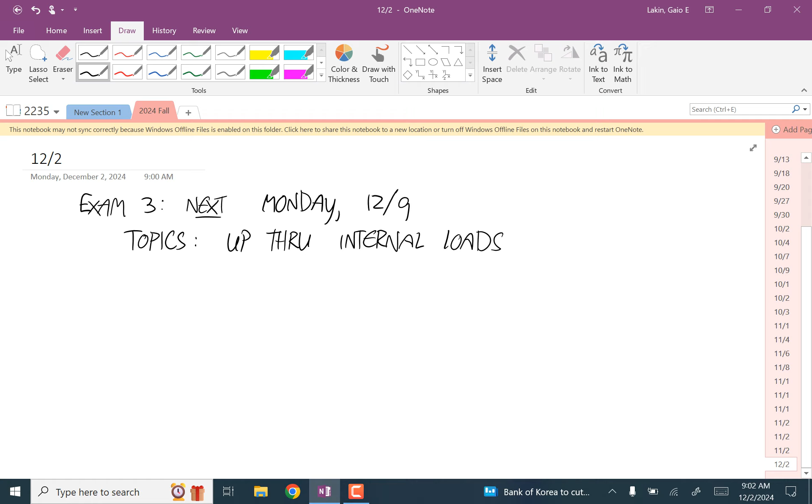But this is about as complicated as these internal loads problems get. Remember, this is the one where we did the structure and calculated the internal loads on all the members, and this was the last one we hadn't done yet. If we have a good chunk of time left after I'm done with this, we'll get into friction.

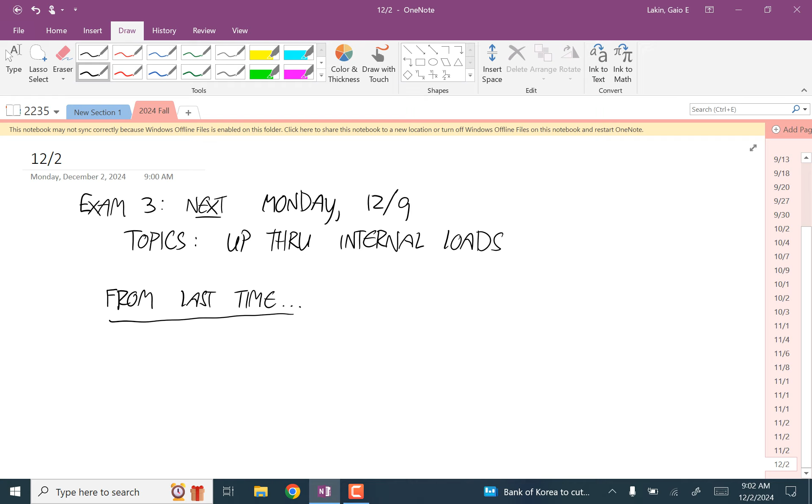Okay, so from last time, we have this beam with a force over here of negative 200.40, negative 34.28, and then just an upward force at the middle of 266.67.

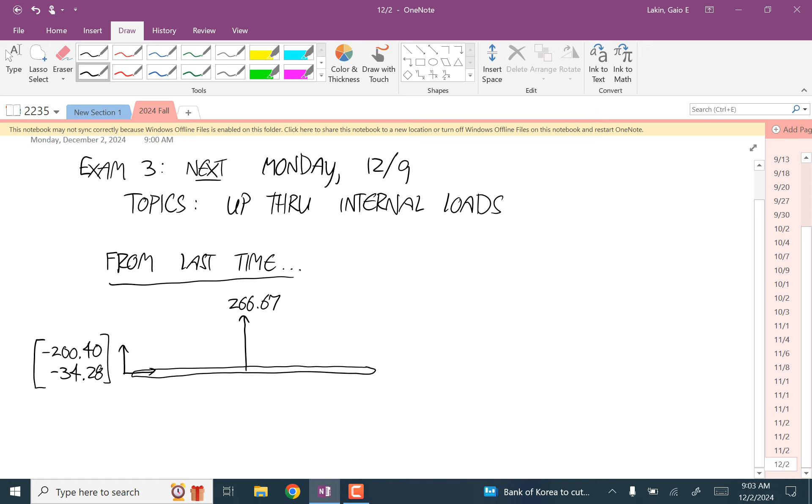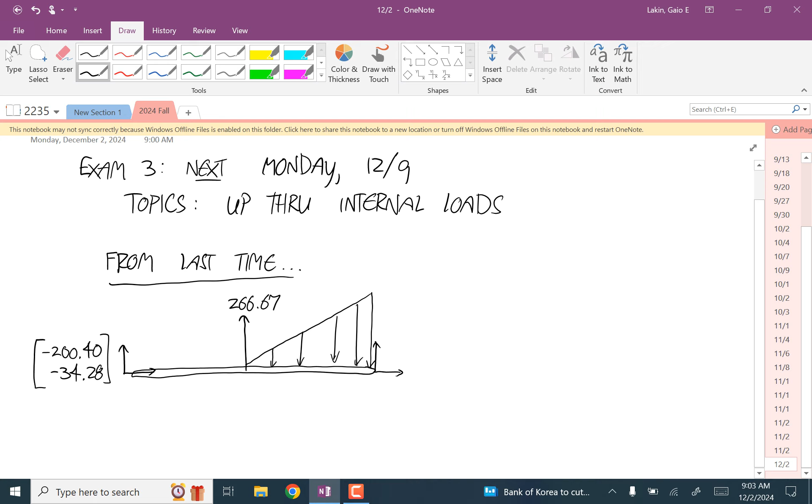A force at the end that I don't have written down - it's not going to come into the internal loads. A triangular distributed load with a maximum of 600 newtons per meter, and a distributed load for the weight of 49.05 newtons per meter.

Okay, so that's the free body diagram of the whole thing before we turn any of these distributed loads into point forces. How many cuts are we going to make? 2. Yep. So there's the endpoints and the one place where, in this case, we have both a point force and a change in distributed load function, so the only cuts are there and there.

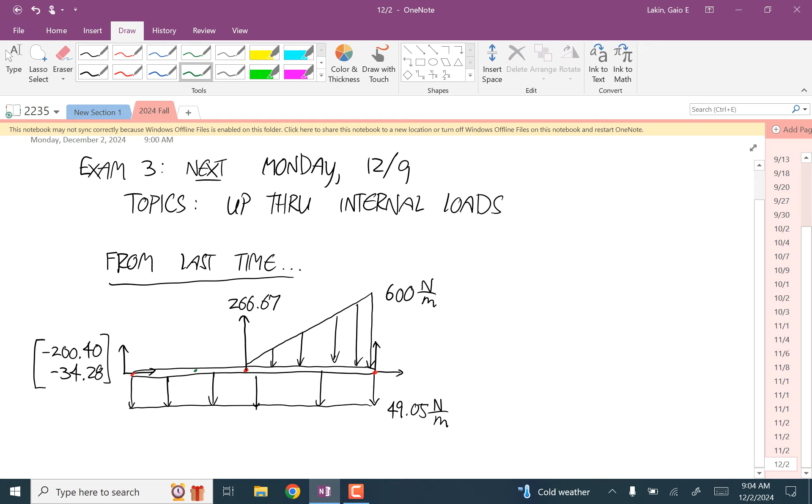I don't have written down how long this thing is. 2 meters? Yeah, I think that's right. So the first cut is for x's between 0 and 1.

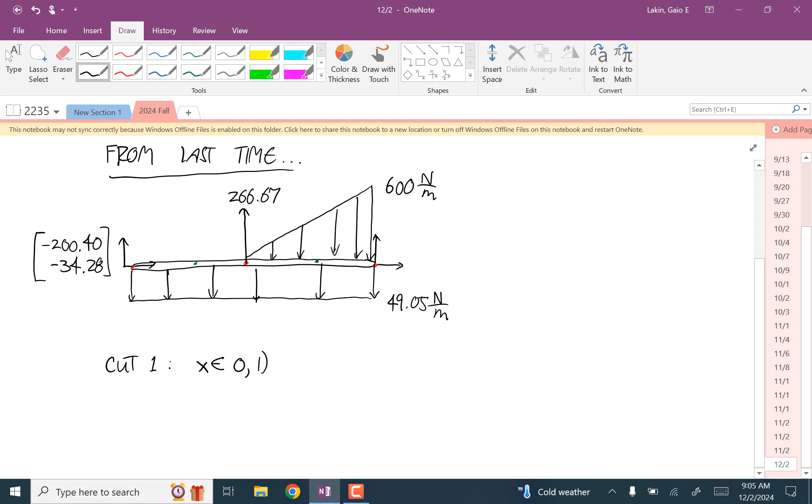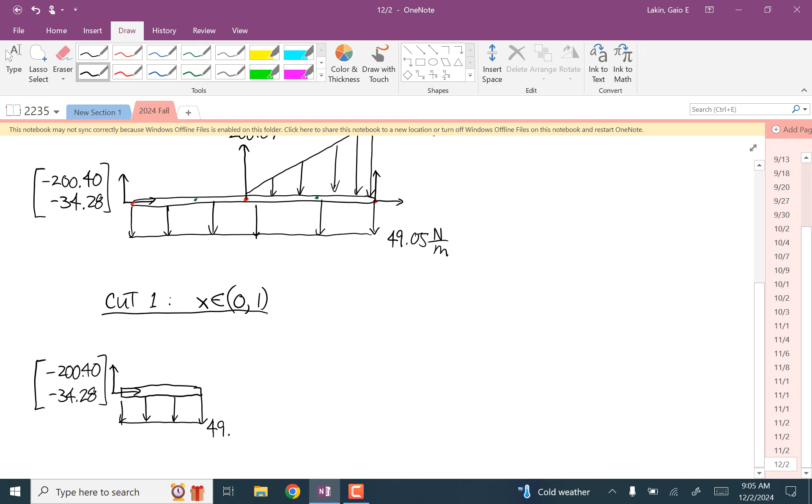And this one's easy, there's not much going on here. Negative 200.40, negative 34.28. And then you have this distributed load with a height of 49.05. The whole thing has a length of x.

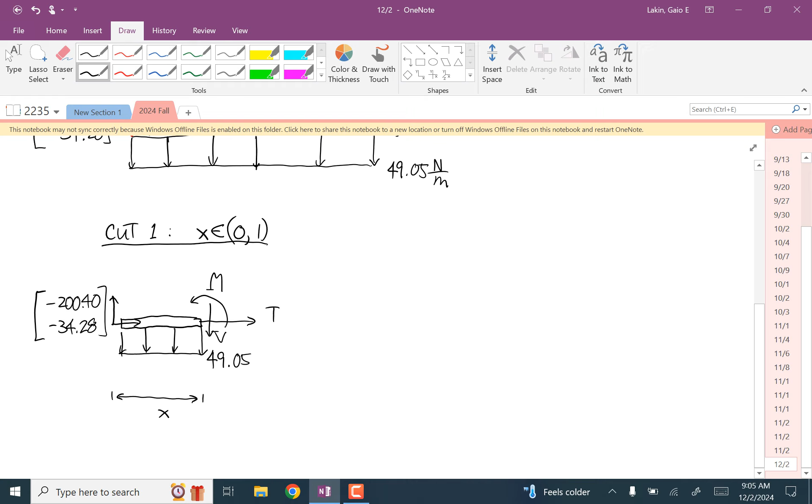And then the internal loads. We need to turn that distributed load into a point force. It has a height of 49.05, a width of x, and the centroid is right in the middle, so from the end this distance is x over 2. The area is the area of a rectangle, height times width, so 49.05x.

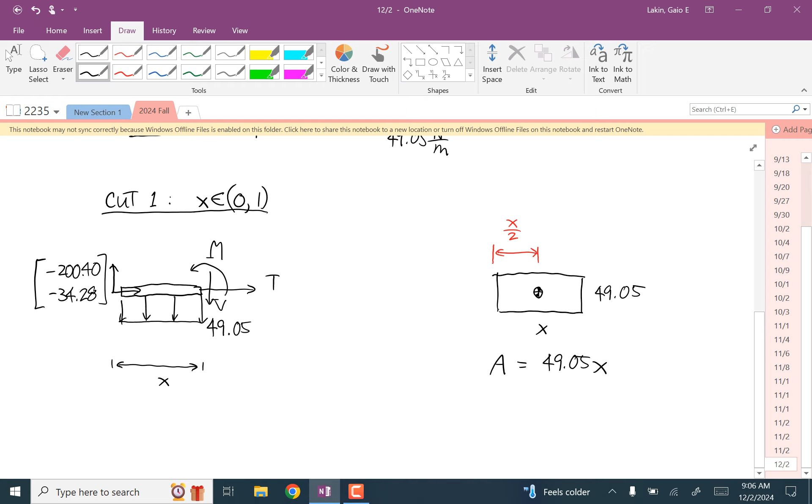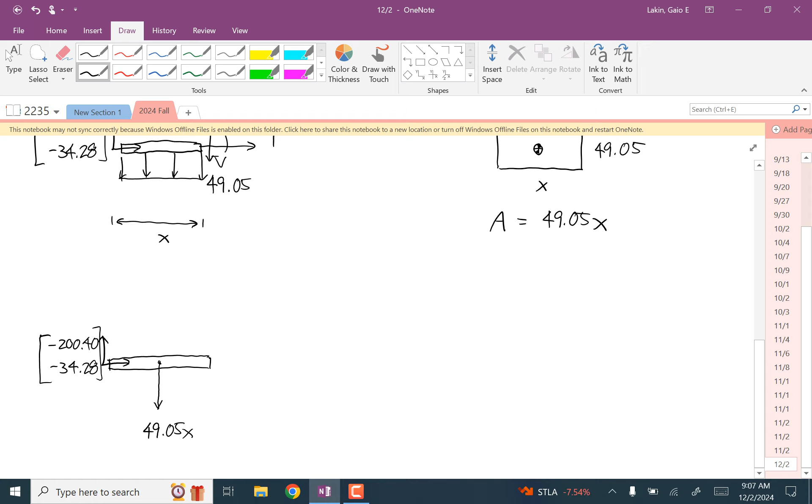And so now we can rewrite this, replacing that distributed load with the point force. So over here we have negative 200.40, negative 34.28, a downward point force at the middle of 49.05x, and then the internal loads.

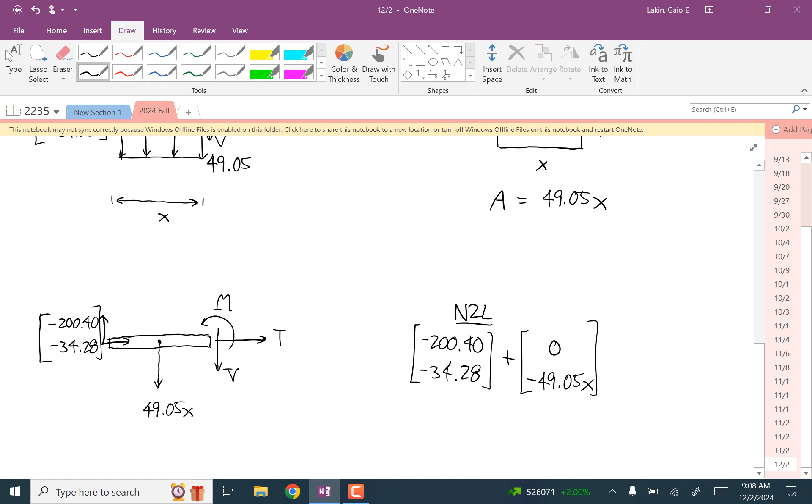So Newton's second law says negative 200.40, negative 34.28, plus 0, negative 49.05x, plus t, negative v is equal to zero.

So the internal tension is 200.40, and the internal shear force is negative 49.05x minus 34.28.

And then the moment equation: we have a clockwise moment, so negative, with a moment arm of x over 2 times the downward force of 49.05x, plus m minus vx is equal to 0.

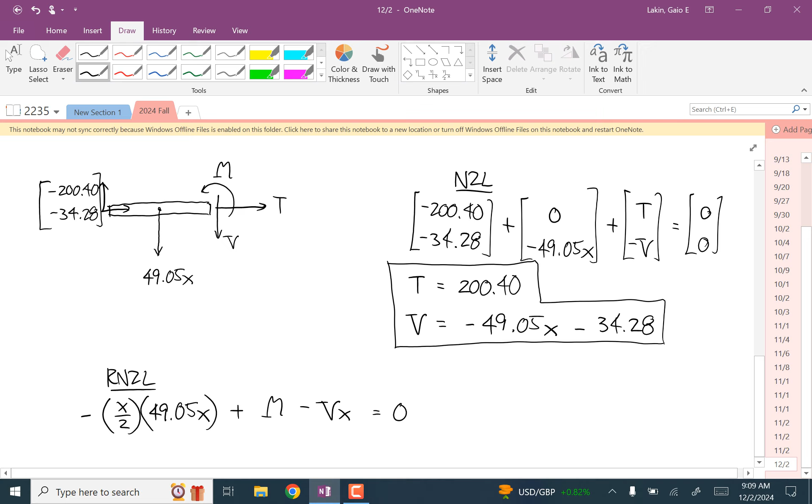And so m is equal to 24.525x squared plus v times x, so that is minus 49.05x squared minus 34.28x. If you simplify, m is equal to negative 24.525x squared minus 34.28x.

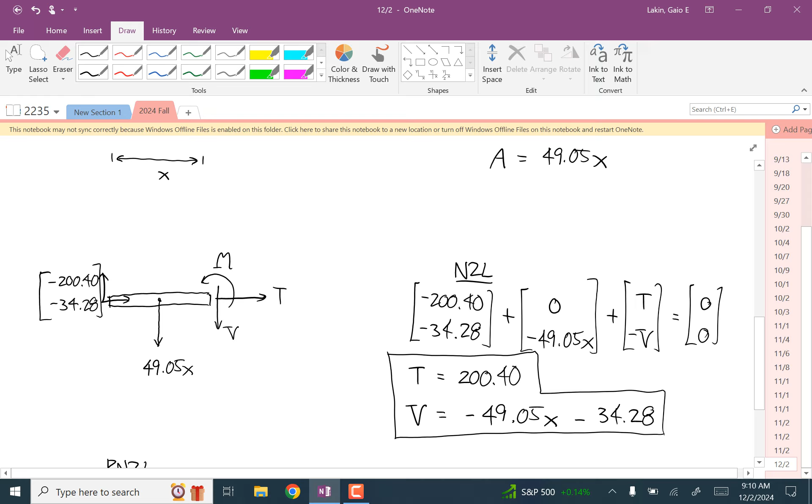dm/dx is equal to v, so that's a good sign. Negative dv/dx is equal to q, which in this case is just that constant, so that's a good sign. Okay, any questions about the first cut? That's way easier than the second cut.

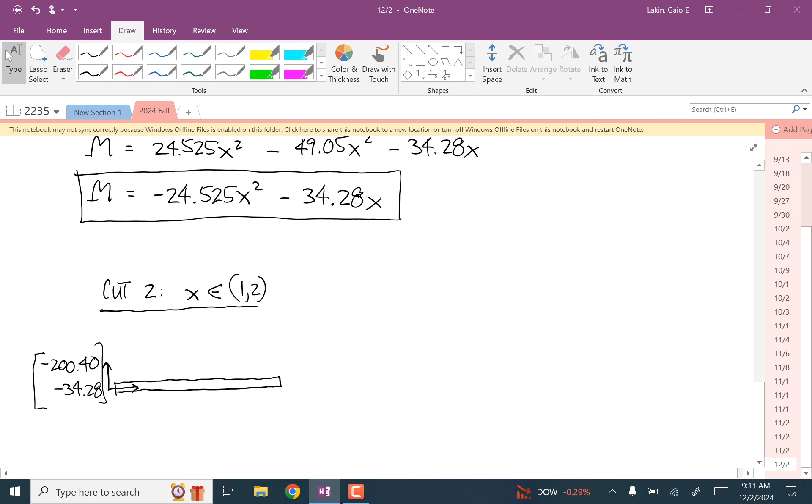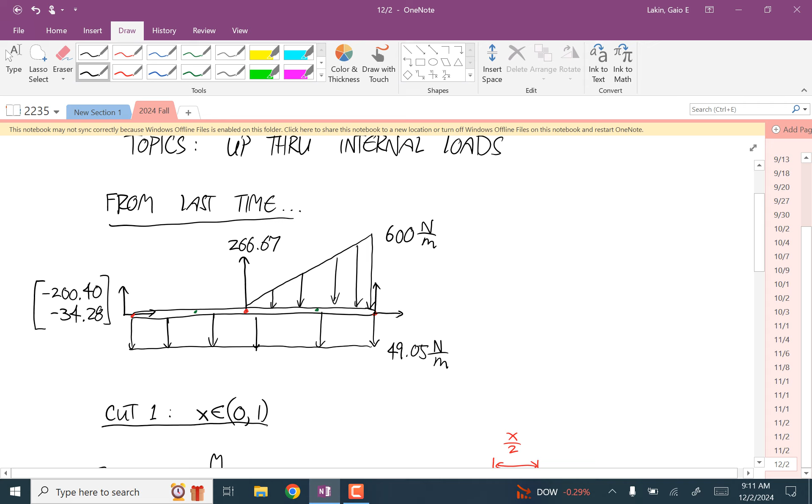So cut 2 is for x's between 1 and 2. At the left end we have negative 200.40, negative 34.28. Now we have new stuff happening at the midpoint, and remember, the midpoint of this overall beam is not the midpoint of this cut. The midpoint of the overall beam is 1 meter from the left end, so let's say here. We have an upward force of 266.67.

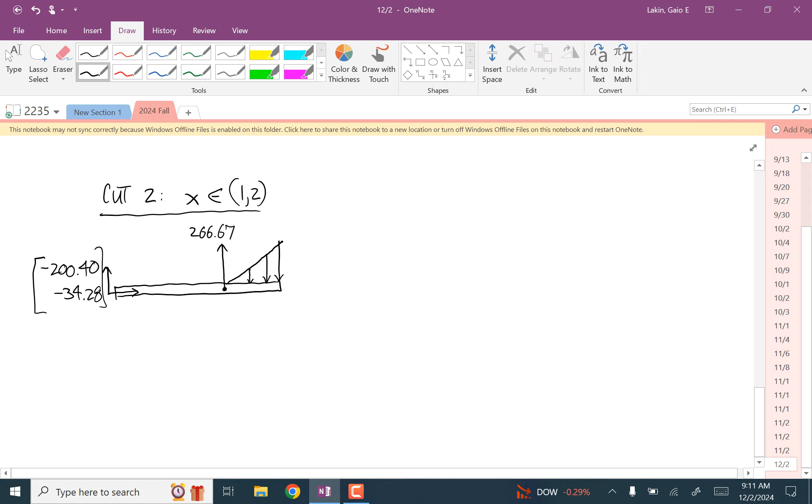Then we have part of this triangular distributed load, but not all of it, and we'll think in a second about what the maximum height is of that triangular distributed load. And then we have the distributed load representing the point force, the weight force, and this has a magnitude of 49.05. And then we have the internal loads.

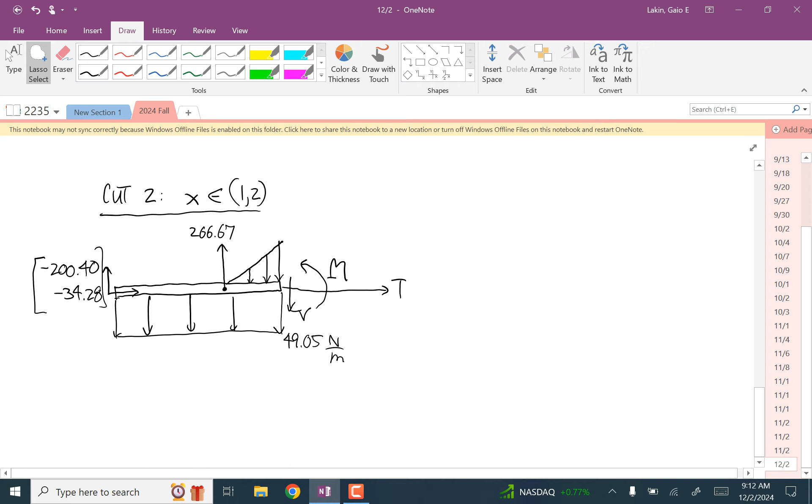Okay, so now we have to come up with, for the height of that triangular distributed load, we have to come up with a function for the line that defines that hypotenuse. Well, the slope is, we can see it goes from a height of 0 to a height of 600 over 1 meter. So the slope is going to be 600.

What about the y-intercept? Well, remember that this place here at the left end is our x equals 0. So the question is where this line would hit that red x equals 0 line. And it wouldn't be at 0 in this case, it would be at negative 600. It might take a little more figuring than that in the case where this didn't start at the midpoint, but at the midpoint it's pretty easy because of the symmetry of it all.

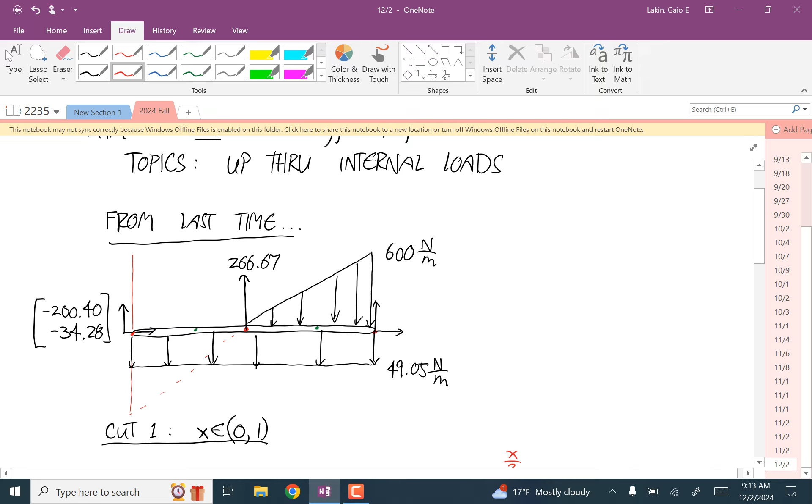And so this height over here is represented by the function 600x minus 600. And this whole thing has a length of x.

We already figured out what's going on for this rectangular distributed load, and everything that we did in that first cut is still the same here. The point force representing this one is going to be at the midpoint of the cut, and the magnitude of the point force is going to be 49.05x. So I'm not going to draw that again. But the triangle, we should think about this.

The biggest new wrinkle here is that the width of this triangle now is no longer x. The width of this triangle only starts at x equals 1. So the width is x minus 1, that full distance minus all the stuff before you get to 1. And the height we have is 600x minus 600.

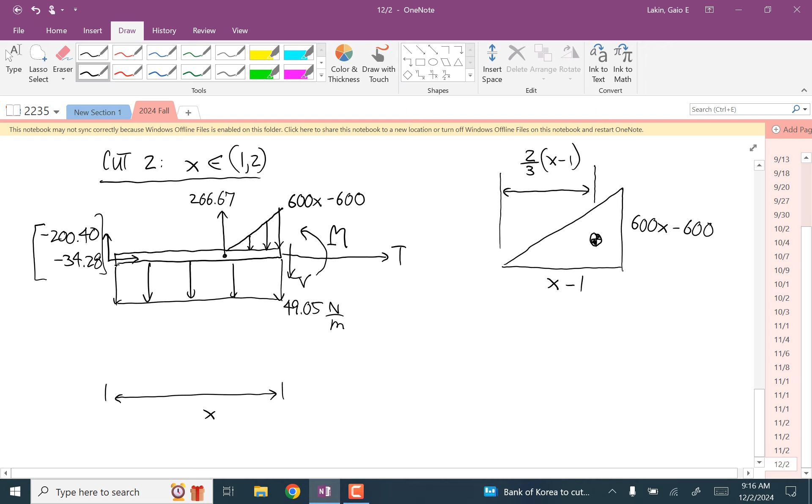And then the area of this thing, well, the area of a triangle is the base times the height divided by 2. I'm going to think of this as 600 times x minus 1. So the area is x minus 1 times 600 times x minus 1, all over 2.

And now we can simplify that a little bit. This is equal to 300 times x squared minus 2x plus 1, which is 300x squared minus 600x plus 300.

Okay, so we've done all this work and we're almost ready to draw our final free body diagram.

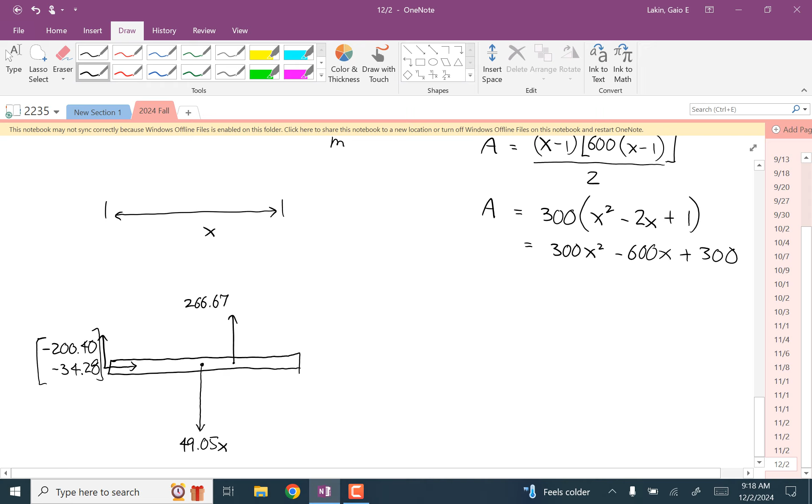So here's the cut. Over here we have negative 200.40, negative 34.28, an upward point force of 266.67. Then from the midpoint of the cut, not the full beam, we have a weight force down of 49.05x. And then finally, we have that point force representing the triangular distributed load that has a magnitude of 300x squared minus 600x plus 300. And then the internal loads.

And then the internal loads. Any questions about that?

Okay, well, let's figure out these moment arms. So this one, this is the point force representing the weight distributed load. What's that moment arm? Yep, that's just at the midpoint of the cut, so that's x over 2. What about this one? Just 1, yep, perfect.

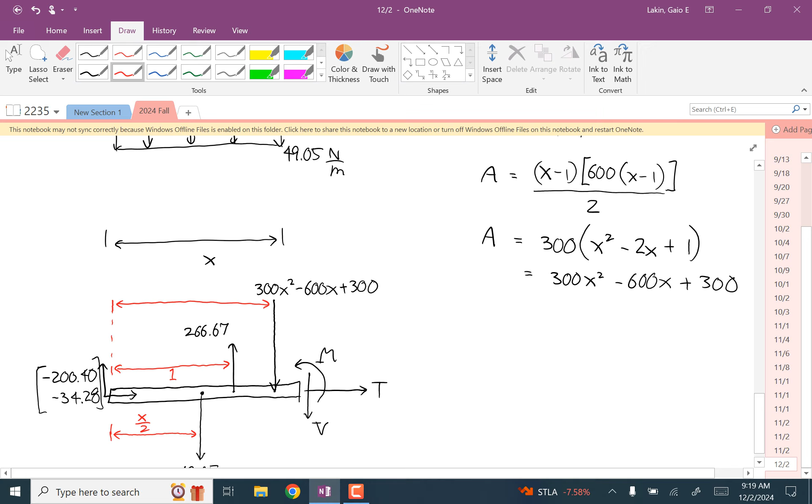And now what about this one? Well, we know that from the 266.67 to this force is a distance of 2/3 times x minus 1. We want to add 1 to that. And so this comes out to be, if you multiply this out, it's 2/3 x minus 2/3. We're adding 1 to it, so it's 2/3 x plus 1/3. So that's how I'll write this: 2x over 3 plus 1/3.

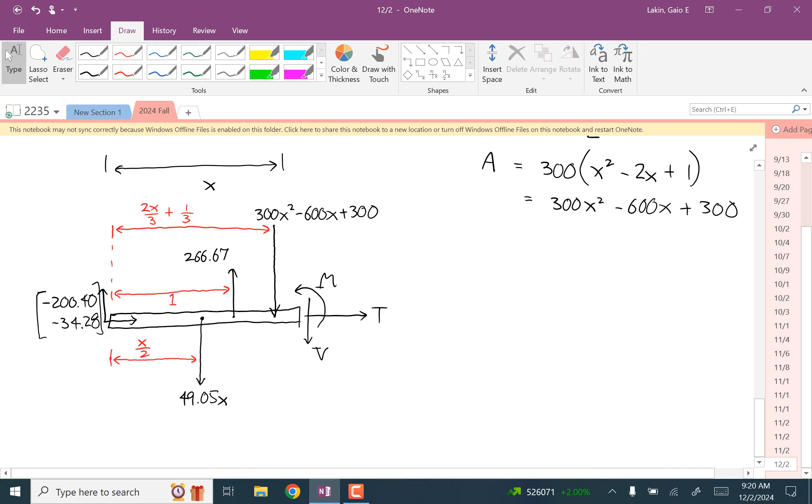Okay, so Newton's second law says negative 200.40, negative 34.28, plus 0, 266.67, plus 0, negative 49.05x, plus 0. Now, this gives us a magnitude. The unit vector is in the negative y direction, so it's this magnitude times the unit vector 0, negative 1, which switches the signs of all of these terms.

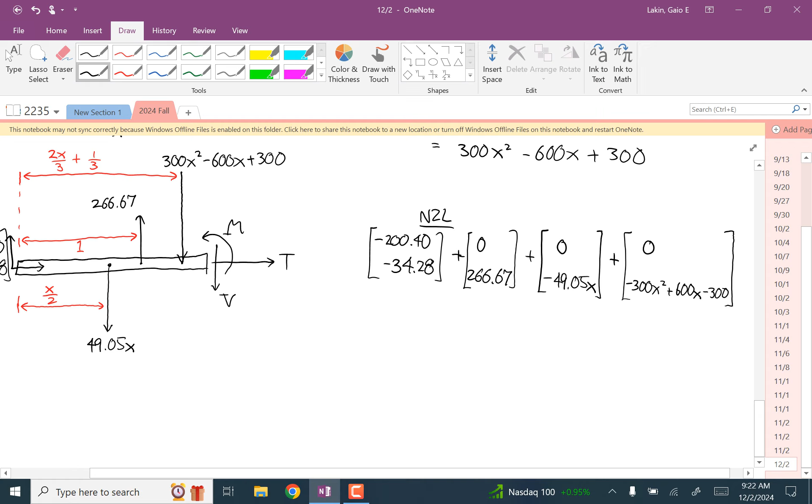So this is 0, negative 300x squared plus 600x minus 300, and then plus t minus v is equal to zeros.

1, 2, 3, 4. Yes. Okay, so from the x equation, t is equal to 200.40.

From the y equation, the shear force is equal to negative 300x squared plus 600x minus 300, minus 49x from the weight. Minus 49.05x, plus 266.67, minus 34.28. Okay, so now we've got to group some stuff.

There's only one x squared, there's two x's, there are three constants. So the shear force is negative 300x squared plus 550.95x minus 67.61.

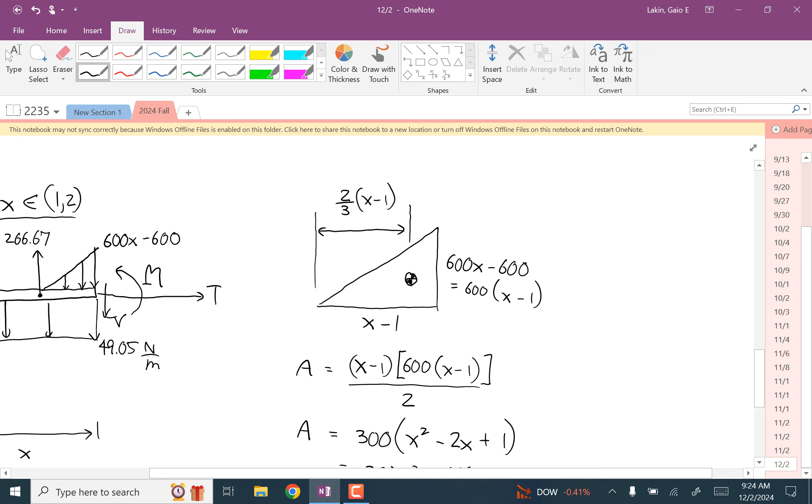And then the moment, this is the one we've all been waiting for. There's a clockwise moment from that 49.05x, so that's negative, moment arm of x over 2 times 49.05x.

There's a counterclockwise moment from the 266, and that just has a moment arm of 1.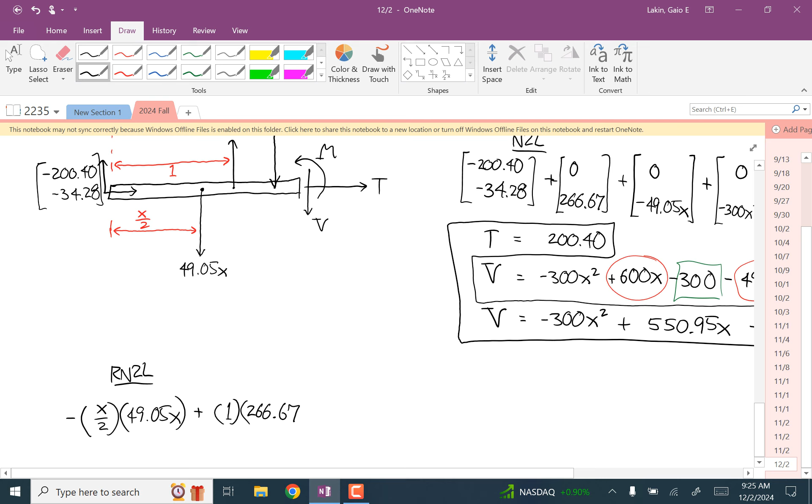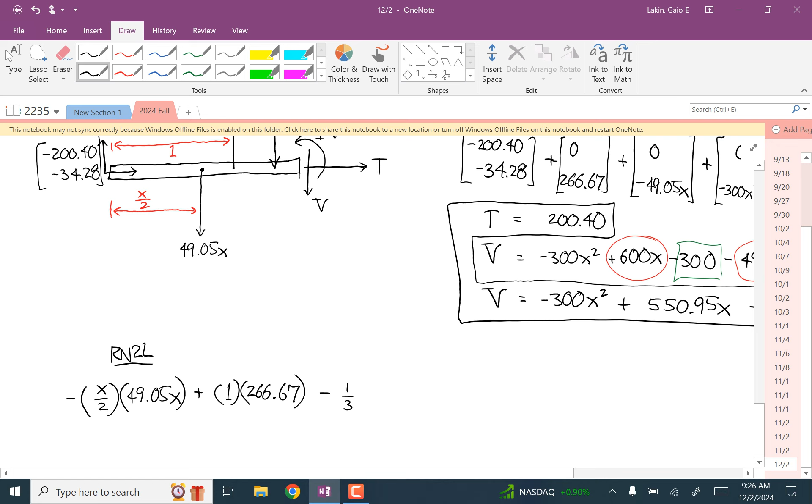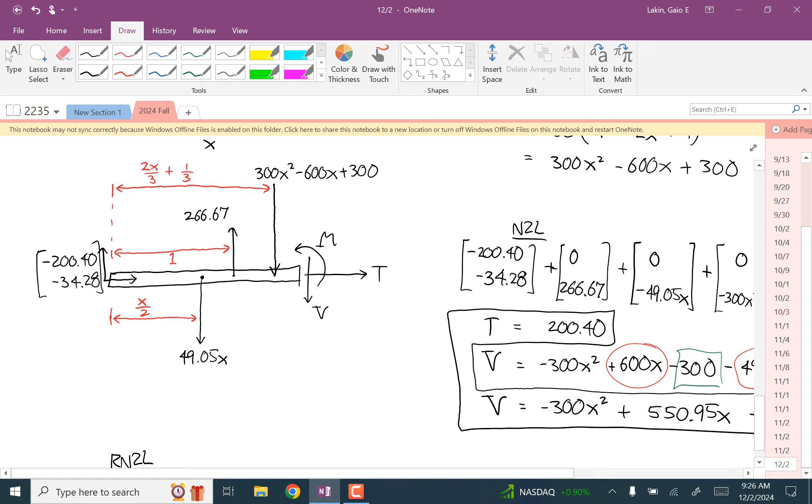And then there's a clockwise moment, so negative, with a moment arm of, I guess I could write this for calculations, I'll write this as 1/3 times the quantity 2x plus 1. And then we're multiplying that by this force, and I guess I'll write that as 300 times the quantity x squared minus 2x plus 1.

And then plus m minus vx is equal to 0. So negative 24.525x squared plus 266.67 minus the 1/3 and the 300 gives us just 100.

And now we got to FOIL this thing out, distribute these. So 2x times x squared is 2x cubed. 2x times negative 2x is minus 4x squared. 2x times 1 is 2x. Now 1 times all these things: 1 times x squared is x squared, 1 times negative 2x is negative 2x, 1 times 1 is 1.

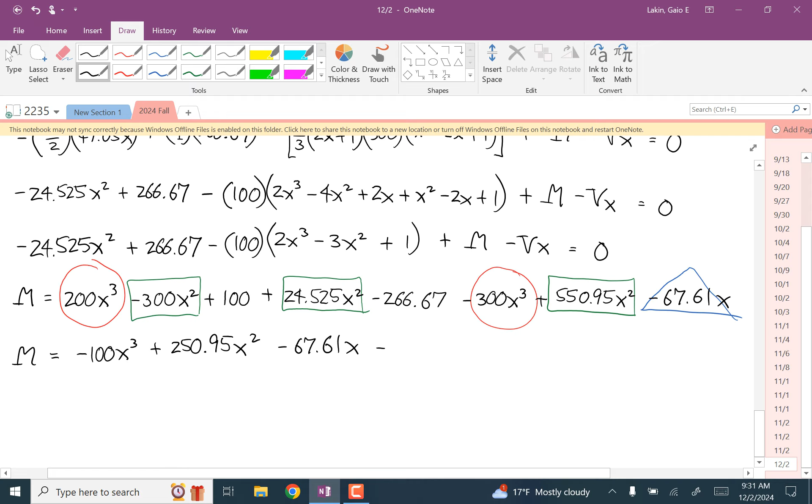X cubed terms: we have one there, one there. Squared terms: one there, there, and there. Linear terms, just that one. And then we have the constants. So m is equal to minus 100x cubed plus 250.95x squared minus 67.61x minus 166.67.

Okay, so dm/dx, the first term. Instead of 250.95x squared, it's supposed to be 275.475 — I think you forgot to include the 24.5 in the middle, highlighted in the green box. The 24.5, 550 minus 300 would be 250. Add the 24 back in. 550, far right — oh, he's right, second from the bottom, you have three squared terms and you only added the outer ones. Oh, okay, yes. So 250 and just add on the 24. Okay, 250.95 plus 24.525, so 275 point, let's call it 48. Yes, thank you.

Okay, so just go term by term. dm/dx for that first term is negative 300x squared. For the second one, that's going to be 550.96x minus 67.61. So the derivatives work.

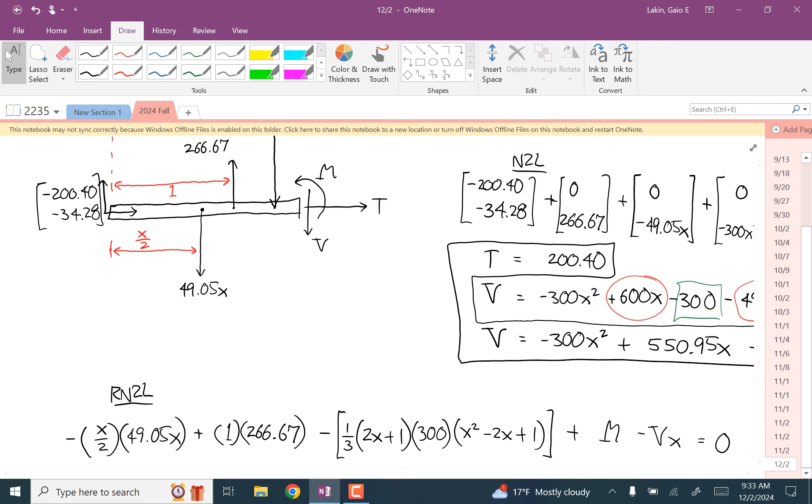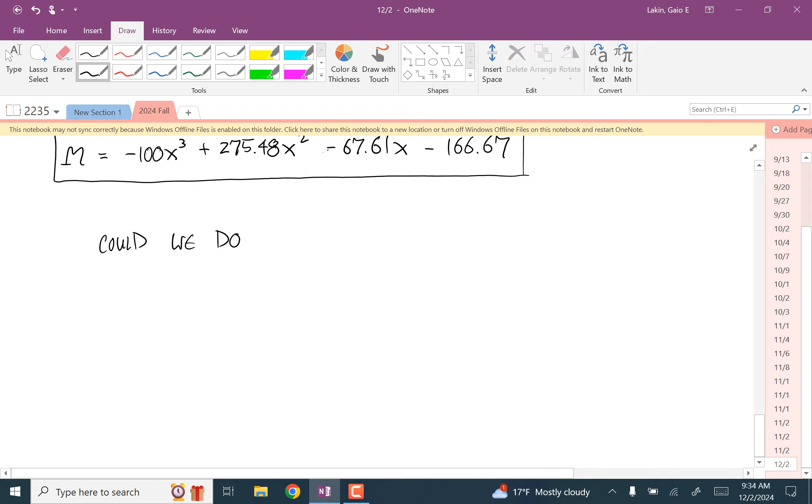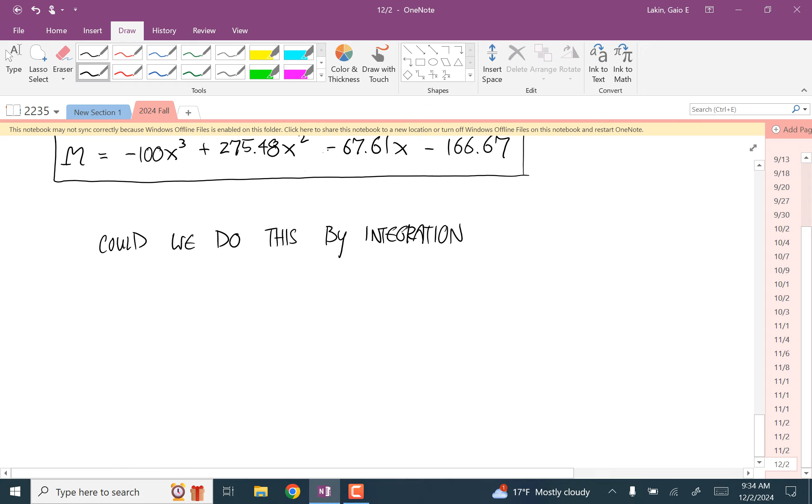Well, we have this — let's say that we go to, so could we do this by integration instead? Let's say that we calculate V. That one isn't too bad going through Newton's second law. So let's say we go to that middle step. We do the derivative check, we're confident with that shear force.

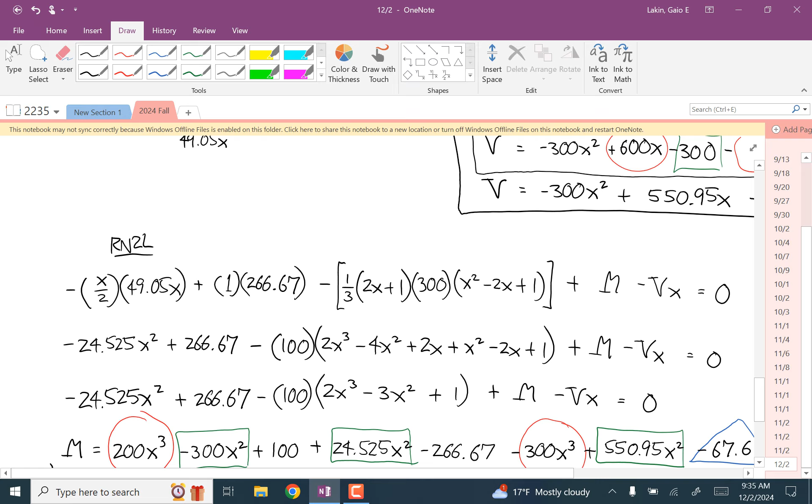And then we say M as a function of X is equal to the integral of the shear force with respect to X. Okay, so M is equal to the integral of negative 300x squared plus 550.95x minus 67.61.

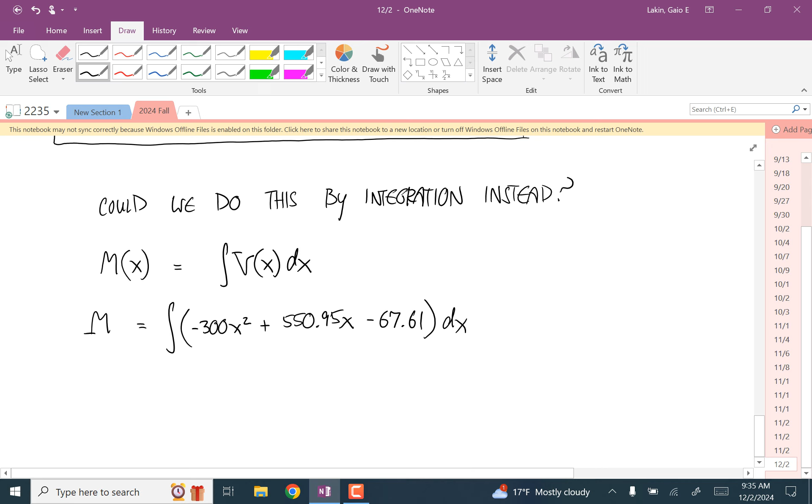dx. Okay, so taking the antiderivative is not going to be the hard part. The hard part is going to be matching up the boundary conditions. So M is equal to negative 100x cubed plus 275.475x squared minus 67.61x plus our constant of integration.

And that's the thing that we have to figure out.

Well, what do we know? So this is only valid on the interval between x equals 1 and x equals 2. So we would like to use that boundary condition at x equals 0, but it doesn't mean anything here.

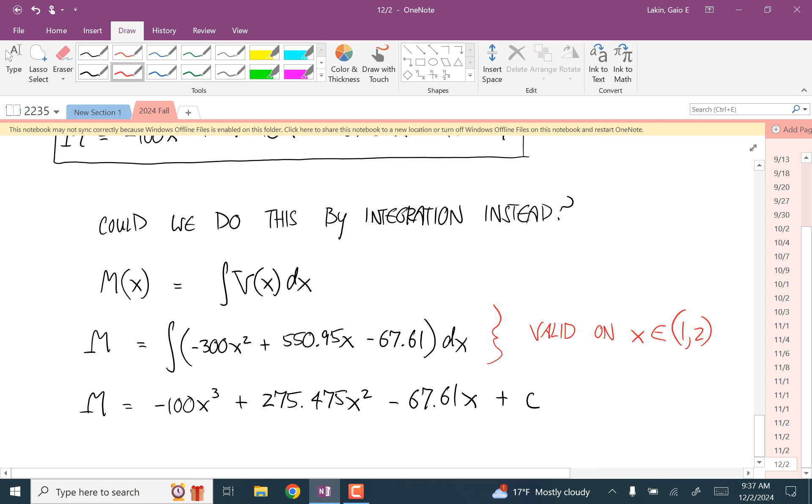So instead, we have to use what that shear force is at x equals 1. So at x equals 1, using the function for this cut, we plug in x equals 1 for the shear force formula: negative 300 times 1 plus 550.95 times 1 minus 67.61. And we get a value of 183.34.

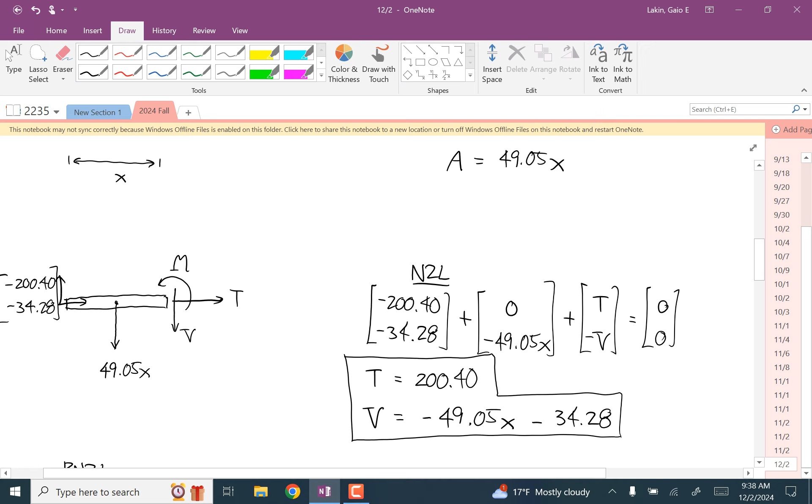That does not help. Oh, I know what we want to do. No, forget all that, sorry about that — that was a detour. So what we need really are the boundary conditions on the moments. The boundary condition on the shear force isn't going to help us.

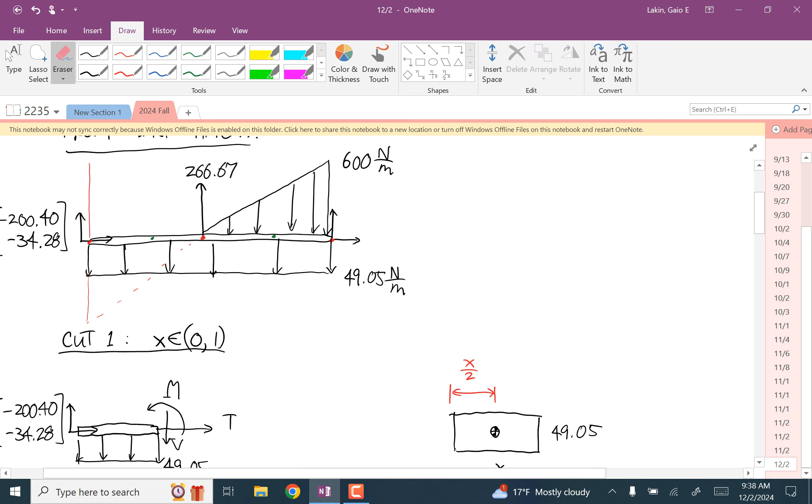So what can we say about the bending moment? We don't know what the bending moment is at x equals 1, but we do know what the bending moment is at x equals 2 — it's 0, because there's no point couple at that point. So pretend I didn't say any of this. We want to look at x equals 2. There's no point couple, so the bending moment at 2 has to be equal to 0.

So, okay, now we're going to go negative 100 times 2 cubed plus 275.475 times 2 squared minus 67.61 times 2 plus c is equal to 0.

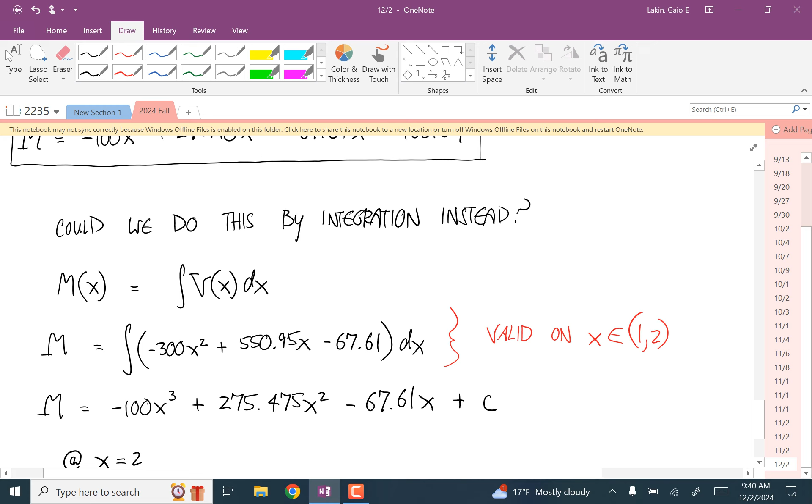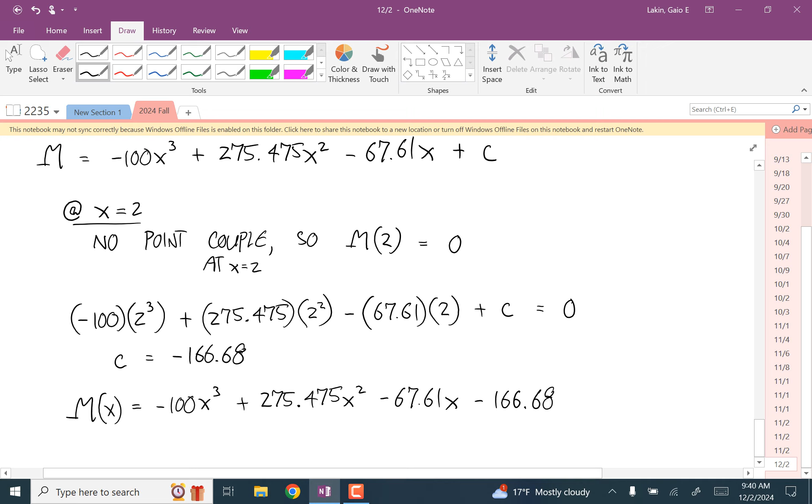And we get that c is equal to negative 166.68. Oh my god, it worked. And so m, as a function of x, is negative 100 x cubed plus 275.475 x squared minus 67.61 x minus 166.68, with a round off error of 0.01 between these two.

Okay, well anyways, that was a lot better than the first way.

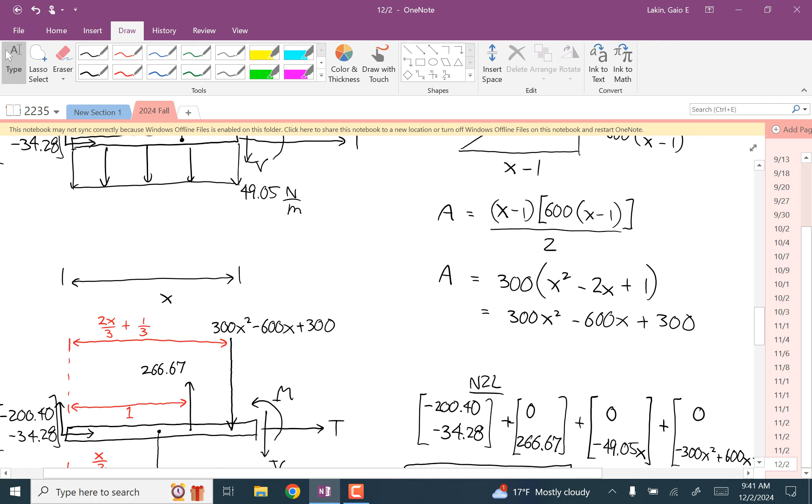Why do we know this is zero, that we're setting it to? Remember those five checks I gave you — the ones we use all the time are the derivative checks, but then the other three are the shear at endpoints. The internal tension is equal to zero if and only if there are no horizontal point forces at the endpoints. Does this ring a bell? The shear force is zero at endpoints if there's no vertical point force at that endpoint. And the bending moment is equal to zero if there's no point couple at that endpoint. So just looking at this beam, we have forces at the two endpoints, but no bending moment, so we know it has to be zero.

Any other questions about that?

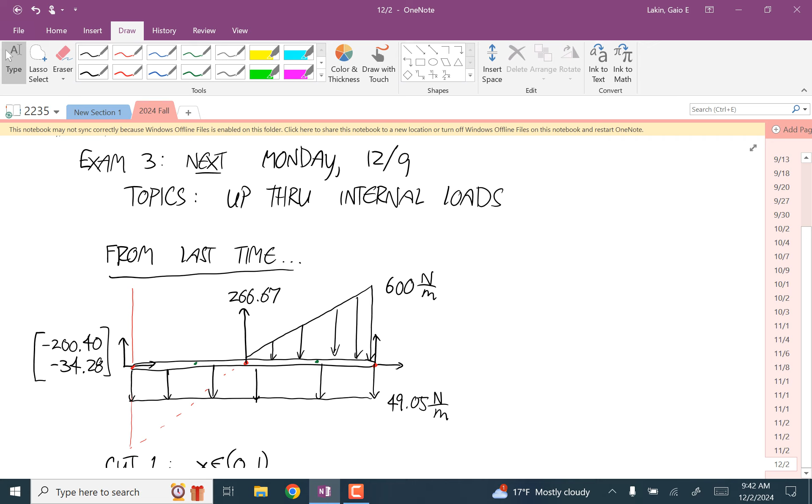The test next Monday is going to be five problems like this. No, just kidding.

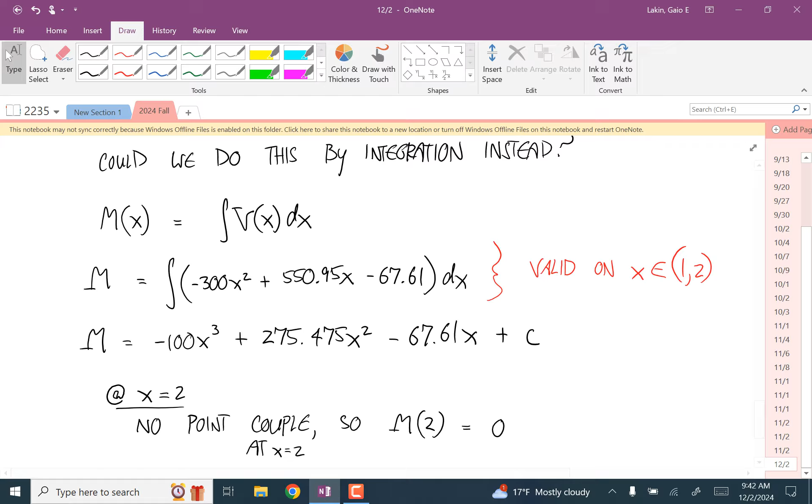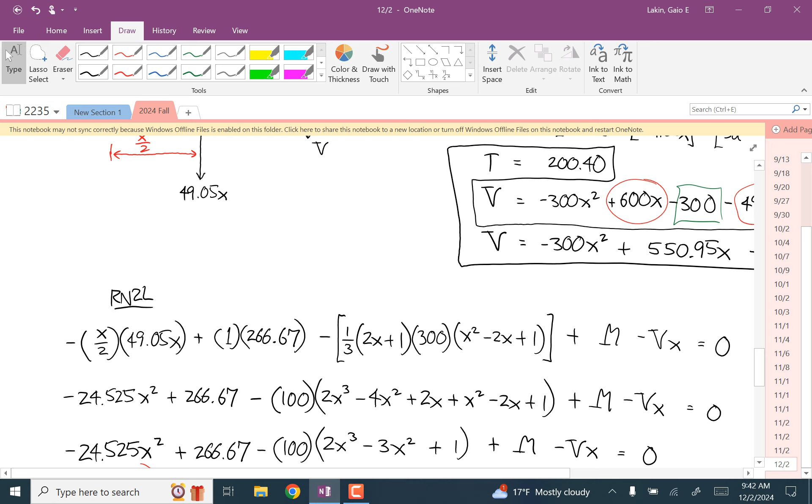But how are we supposed to check our work? Yeah, exactly, you can't check your work then. I mean, so you're giving up a lot. But I would use the old way — I just always use the old way because it's better to be sure than to be fast always, I think, as an engineer. I really can't imagine any case where people are like, it's okay to get one fifth of your problems wrong, just be fast. I just can't imagine that scenario. So I always think it's better to do the Newton's laws approach, and then you have the derivative check there. But this is just how it would work.

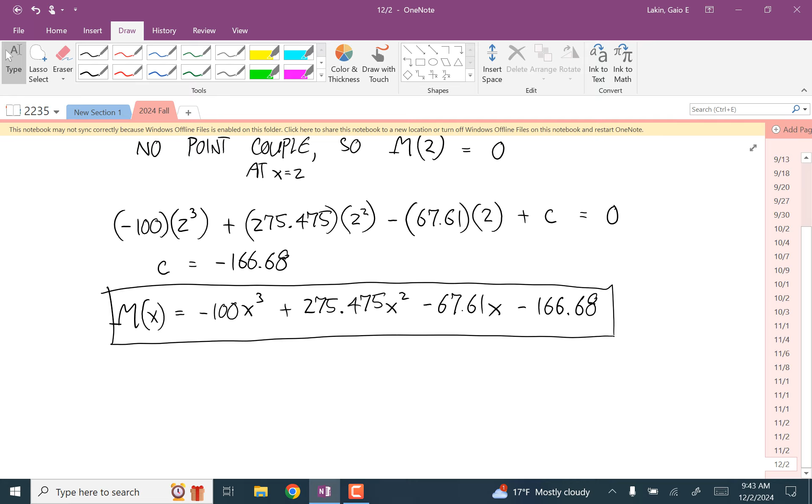But you'll still give us credit if we use this to get an answer, right? Yeah, okay, the right answer — if you're right. Even if you get a wrong answer, to be honest, if you do all the things right and you just get to this point and don't add these two things, then my answer would have been wrong and I would have been really unhappy about it, but I wouldn't take off points on a test for a mistake like that. So, yeah. I'm always secretly proud of people when you don't take my advice. So if you go that way, I'm like, all right, that's the spirit.